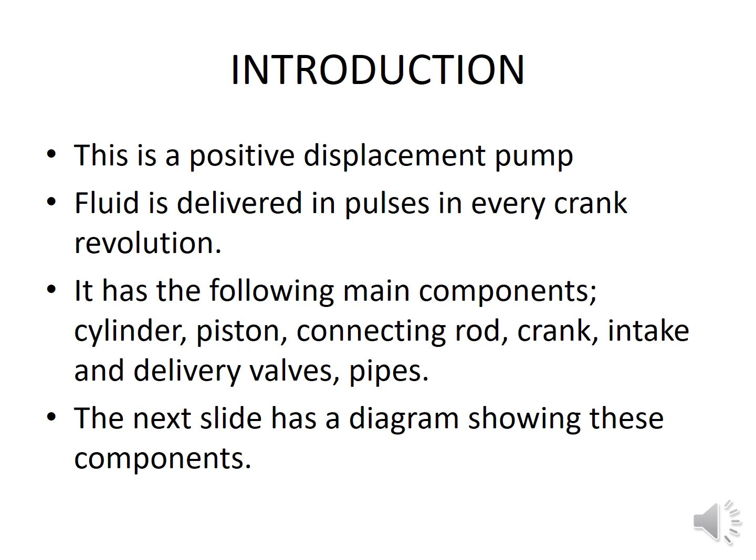Now, in the next slide, we are going to see components of a single acting piston pump. So, we have delivery pipes, as we had already discussed earlier on. We also have a cylinder, whereby inside the cylinder we have a piston that is connected to a piston rod.

The piston rod is also connected to a connecting rod, which is connected to a crankshaft that is the sole or prime mover of the piston pump. The crank rotates in a rotary motion, while the piston moves in a reciprocating motion. The connecting rod, as you can see, changes the rotary motion of the crank to the reciprocating motion of

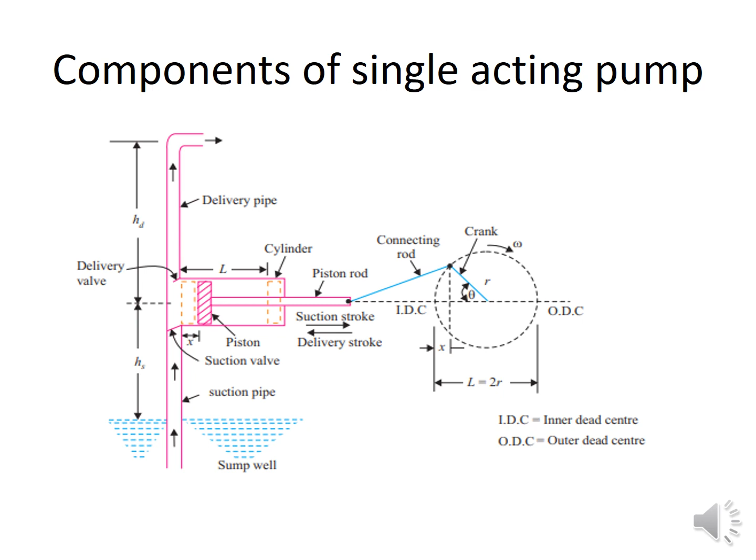the piston. Now, let us look at the next slide, where we are going to discuss the working principle of a single acting piston pump. So, a single acting piston pump works in two strokes. The first one is the suction stroke, whereby the piston moves outwards due to crank rotation, and so a vacuum

is created inside the cylinder bore, and since we have a negative pressure which is created by the vacuum, suction of fluid takes place due to a higher atmospheric pressure acting on the water or fluid beneath. Fluid enters the cylinder bore through the suction valve, while the delivery valve remains closed.

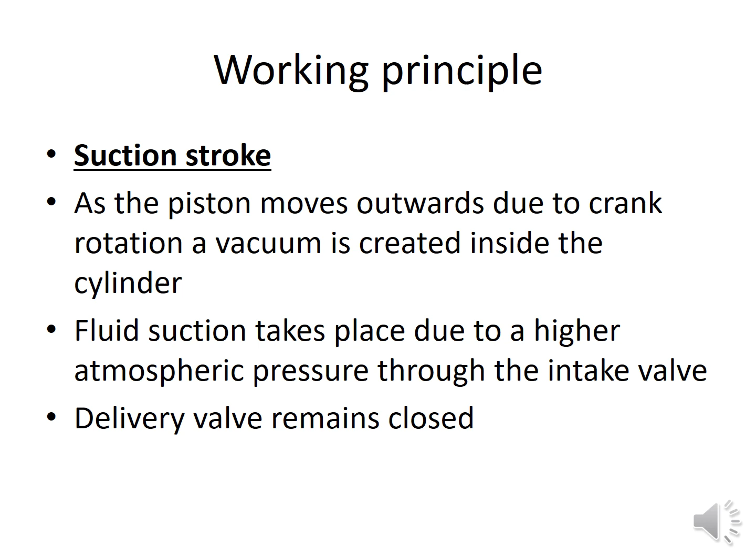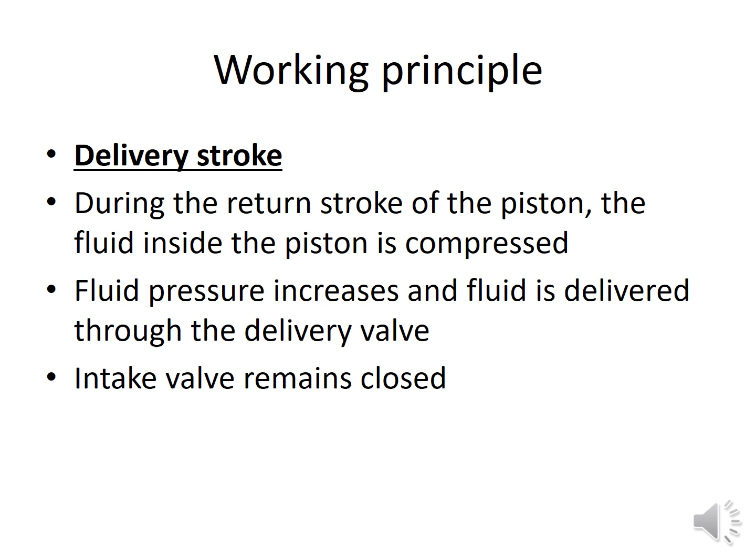During the delivery stroke, the piston goes back, and we refer to this as the return stroke. Now we have fluid content inside the cylinder. The content is compressed, and as a result, the fluid pressure increases. As it increases, it causes the delivery valve to open as fluid is pushed out of the cylinder bore through the delivery valve, while the intake valve remains closed during this stroke.

Here is an animation showing the working principle of a single acting piston pump. Let's have a look and see how it works. Now, you can see we have a suction valve. The piston now during the suction stroke is moving outwards, and fluid is allowed to enter the cylinder bore. Then during the return stroke, you can see the fluid moving outside through the delivery valve.

So remember, we have creation of a vacuum pressure which causes intake to take place inside the cylinder, and as compression takes place by the piston going back, pressure increases inside the cylinder bore, and fluid gushes out through the delivery valve. I hope that animation was helpful and gave a good idea of how a piston pump

works. Now, in the next slide, the suction valve allows the water to flow inside the cylinder. During this time, the delivery valve remains closed. As the piston starts moving towards the left, the suction valve closes and the delivery valve opens. Due to the pushing action of the piston, the water goes out from the discharge valve to the delivery side. This is how the single-acting reciprocating pump works. But with this type of pump, there is a drawback.

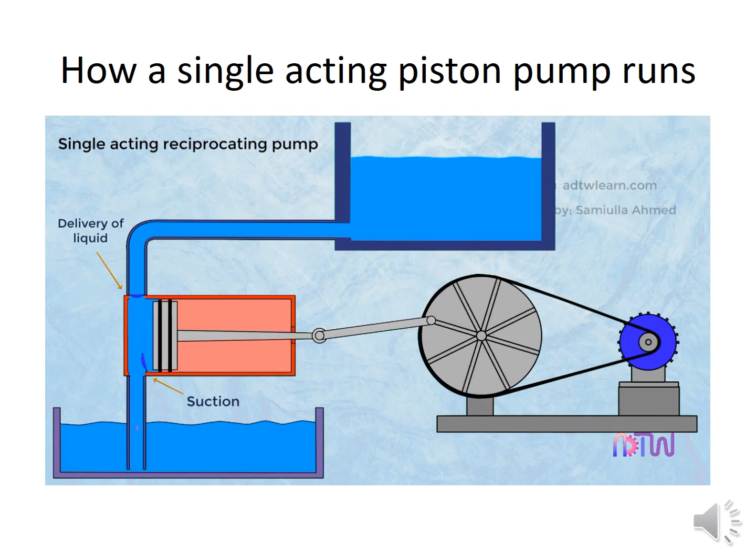We are going to look at the power developed by a single-acting piston pump to discharge fluid running at n revolutions per minute. So, what is power? We can define power as the rate of doing work. According to Newton's laws of motion, work is the displacement moved by a certain force. For example, the movement of a piston inside an automobile engine is a good example of work.

Okay, now what is discharge? Discharge is the volume flow rate, and its SI unit is given in meters cubed per second. Now, how do we derive the volume? Volume can be derived as pi r squared times L, or rather, volume of a cylinder is given by cross-section area times height. Now in this case, L is the height or the stroke length, and D is the cylinder diameter. So we can have the formula as pi r squared times L, or pi d squared over 4 times L.

Now let us define what is density and how it is going to help us. Density is the ratio of mass to volume. Okay, now we want to define weight, but in order for us to get weight, we have to know the mass. Then we multiply by the gravity acceleration. Now if you make mass the subject of the formula, then we are going to have mass as a product of density by volume.

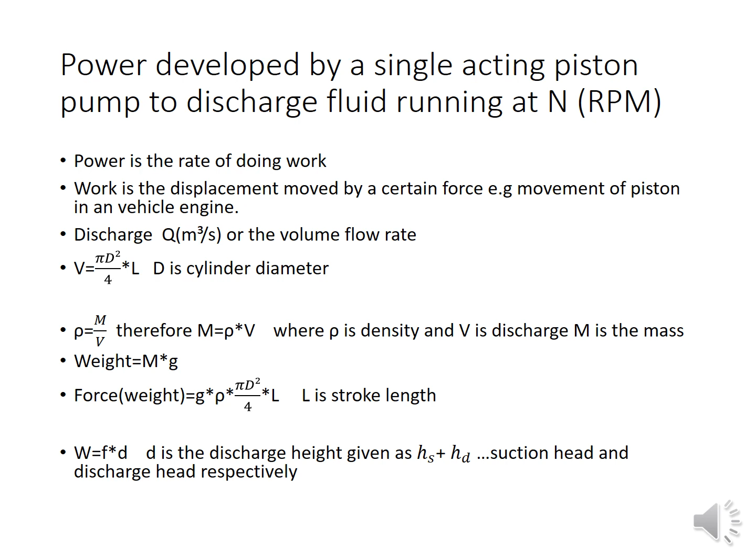But what is the distance the fluid is going to be displaced? Remember, in our diagram we had suction height and delivery height. In this case, these are going to be our displacement distance, whereby the total displacement is going to be given as hs plus hd.

Okay, so in our next slide we are now going to define work, which we said is the force times the distance. Now the force, which is the weight of the fluid being displaced, is given by gravity acceleration times density times the volume. Now in order for us to get the work, we have to multiply it by the distance, which is suction head plus delivery head. Okay, I hope that was clear.

Now let's say the pump is running at n revolutions per minute. So what is the power developed by that pump? Remember that we said power is the rate of doing work. Now all we have to do is take the work and multiply it by the rate of doing that work, which in this case is n over 60. The reason we are dividing by 60 is because we have it per minute, and we all know that the SI unit of time is the second, so we have to divide it by 60.

Now the final equation of power will be given as density times gravity times L, which is the bore stroke or the length of the cylinder, multiplied by the revolutions, which in this case is N, multiplied by pi d squared over 240, which is a product of 60 by 4, and now multiplied by the displacement, which in this case is hs plus hd.